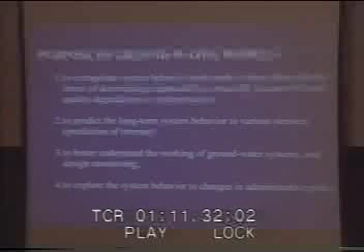Now, what did we start out to use the models for? I can't see that slide very well, I apologize. But the first thing is that we're using the models in a way to determine who's responsible for certain actions, particularly what PRP contaminated a certain aquifer. Where did the contamination come from? Who was the PRP? So that's one of the issues that the models are being used for. So in this sense, we're trying to backcast with the models, go backward in time, to try to see who was responsible.

Okay, the next thing is we've also tried to predict into the future what happens if a certain stress is put on the system, and a lot of the models do that sort of predicting into the future. When we've gone back to look at how well we do with those predictions, it turns out they're not very good. The post-audits we've done suggest that the predictions were not very valid, for good reasons, I think.

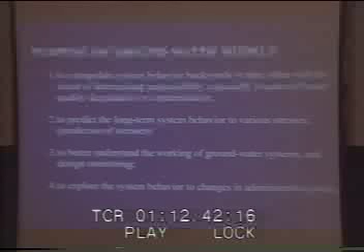Now, some of the things that the models could be used for is to gain a better understanding of the system. And that doesn't take a terribly sophisticated model in most cases. In most cases, we could do that with a relatively small model, fairly unsophisticated, and we could ask simple questions of how does the system behave. I don't see very much of that going on. We could also use the model to try to design where are the appropriate places to sample the system. Where should we be looking for data in the system? That isn't going on very much, in my opinion, either.

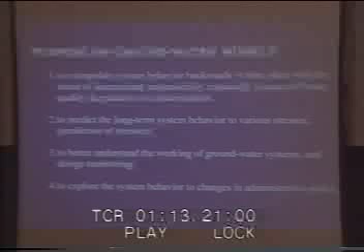And the final thing is the models can be used, I think, in a policy analysis to try to say, in a particular case, what is the best way to manage this aquifer? Are there better ways to manage the aquifer? And what drives the aquifer? What are the critical issues as far as the aquifer is concerned in terms of its management policies? All right. So those are my categories of what I think the models are being used for, and I think we're seeing that much of the effort lies up here, particularly at the present time, at least what I see in my consulting practice. And these are the models that I think are getting very complicated.

All right. Now, one of the other things that you say to yourself, okay, we're going to go to court with these models. What are the things that we need in the modeling effort? And we all know what those are. We need some estimate of the transmissivity. We need some estimate of the storage coefficient. We need the boundary conditions. We need what the stresses are in the system.

Now, the question is, how many of those things do we measure independently? Well, in the case of the pumping tests, we certainly have procedures where we can measure transmissivity by pumping tests and various kinds of pumping tests.

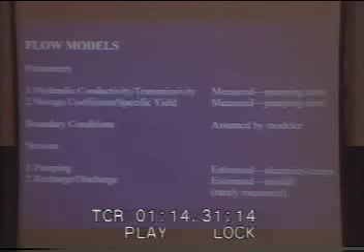All right. Those pumping tests also yield some estimate of the storage coefficient, but usually what you find is that when you extend the model into the future or you try to make some long-term assessment of what the storage coefficient is, what you get from the pumping test analysis is generally on the low side. So we don't know from the pumping test the storage coefficients very well. And we get a better measure of that from the long-term analysis as a system, usually done with the model.

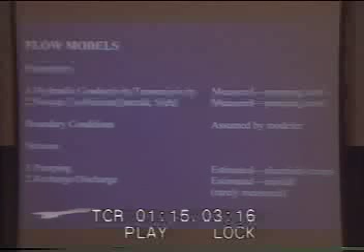The boundary conditions are assumed by the modeler. Sometimes we have pretty good ideas on where the extent of the aquifer goes. And then the models are very sensitive to what the stresses are. The stresses are known not all that well.

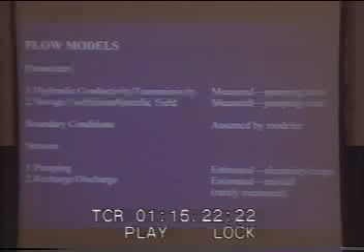We estimate stresses in many cases from metered electricity. Of course, the pumping depends on how efficient the well is, and often we don't know how efficient the well is, so we estimate the pumping based on the electricity, or we estimate the pumping based on, in agricultural situations, what the crop requirements are.

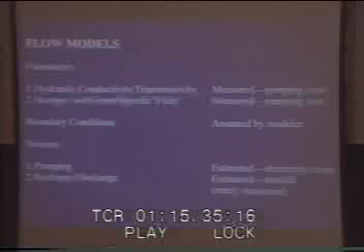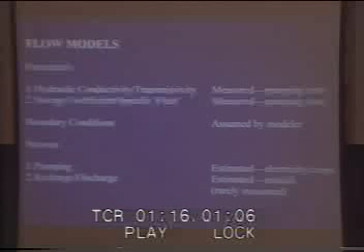So again, we see that the stresses, which are critical to the modeling, are not known all that well. In fact, in some cases, I don't think they're known very well at all. All right, so that's the flow models. So we may be able to measure the transmissivity reasonably well independently of the model, and we may have some reasonable estimate of what the stresses are.

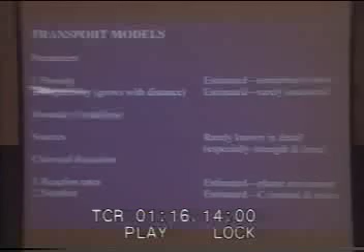When we look at the transport models, we see something a bit different. What we find is, first of all, the estimates of porosity are not very good. There aren't very good ways to measure porosity. Sure, you can measure cores in the laboratories. Cores have the same problems as measuring permeability in the laboratory.

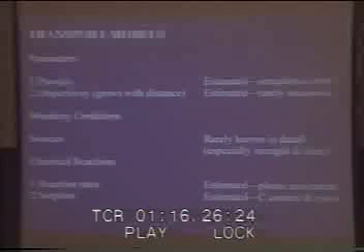So we make an estimate of porosity based on what the aquifer material is. Rarely do we go in the field and try to measure the porosity with some kind of neutron probe. It's done, but rarely. Okay. We find from the dispersivity that we don't know what the dispersivity is. We know it grows, usually with the distance that the contaminant is moved, and it is very rarely measured independently.

And we go on: the sources particularly are rarely known in time, particularly when you say to yourself, well, when did that contaminant come into the system? We don't know. We know the plant was built in 1962. We have some idea of what the contamination looks like at the moment. We don't know what that source term looked like. And the same is true of the chemical reactions. How do we get the chemical reactions?

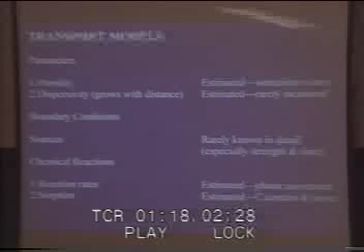Well, we get the sorption from, in fact, we get most of these parameters from the model fit. So these things are not measured independently. We're getting them from the models. And then you say, well, how good are they? I think it comes back to how you feel about the inverse problem, and how good is your optimization on what the parameter set should be. But again, you're backing almost this entire parameter set out of the transport models. They're not measured.

So for that reason, you can come back in a courtroom and challenge most of these things. You can say, well, did you measure that independently? No, we got that out of the model, which may or may not be adequate.

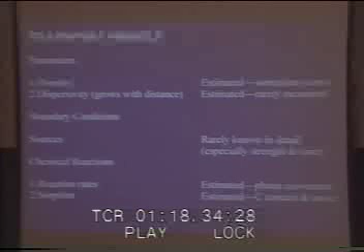All right. Now, what I'd like to do is show you a model analysis that we did recently for Mexico. I'm working for the World Bank in Mexico, and this Hermosillo aquifer that I'm going to show you in a minute is kind of a case study of aquifer problems in parts of Mexico. And I'd like to use it to illustrate how I think the models can be used in an efficient way.

All right. Now, as I said, I'm working for the World Bank. We're looking at groundwater all over Mexico, but we're focused in on Hermosillo as one of 5 aquifers that we're going to use as case studies. I'm working with an economist, an old-time friend, Bob Young, retired from CSU. Bob and I worked at Resources for the Future in the early 1970s on similar problems.

And this aquifer is rather interesting. Pat Domenico did a model of this some 25 years ago, so Marty Mifflin tells me, as part of a water plan for Mexico. So it's an aquifer that's well known. It's an area of groundwater development in Mexico that's well known. It's near Hermosillo in the state of Sonora.

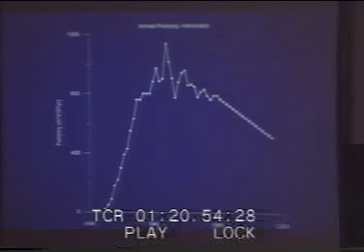But what I expected was that near the coastline there would be the sort of thing that you see with seawater intrusion, everything would have gone out of production. What we saw was that it had gone out of production along the coastline, but it was out of production everywhere. There was a lot of this irrigated area that had been let go fallow. So it was clear that not the only problem was seawater intrusion, something else was going on as well.

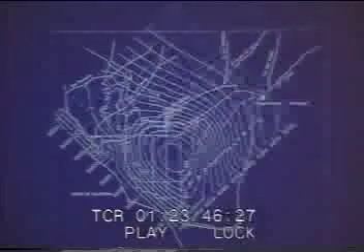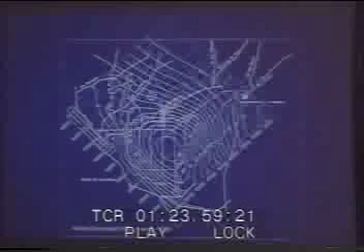All right. So we modeled it, first of all, to get some kind of 1996 drawdown. And this is the model here showing we get about 55 meters of drawdown. It doesn't have all the features of the observed drawdown, but it isn't too bad in terms of fitting the cone of depression over the entire area. So that's the 1996 water level projected by the model.

This is the seawater intrusion projected by the model, and you see that there's a zone here, this goes from zero. It shouldn't be zero. It's about 300 parts per million background. But anyway, this is the buildup from seawater coming in, and we go from something like 500 here to around 5,000 in this area. And you can see the bay here, this Kino Bay, has some big effect on it. At the moment, 1990s, present time, we've lost about 12 to 13% of the irrigated area.

So you can see this was the original irrigated area right in here, and something like 12% of it has been lost to seawater. All right.

Now, one of the things we tried to do in this case was to link a simple economic model to the groundwater model. So we calculated what the water pumping would cost in terms of the lift costs. We calculated both the fixed costs in terms of the investment costs and the pumping costs associated with water development. And then we looked at this set of crops, which was determined by the Mexicans here. You can see I think there are 17 or 18 crops here.

Some of them are field crops, and some are fruits, grapes in particular, things that are higher value crops and require more care in terms of the irrigation and also some investment in developing the crops themselves. Particularly things like grapes, you've got 3 years or so before you begin to get any yield. There are pecan trees in here which take a longer period of time to get some yield. So this was developed by the Mexicans. Things here are in hectares, and I don't know if we got prices here in terms of pesos.

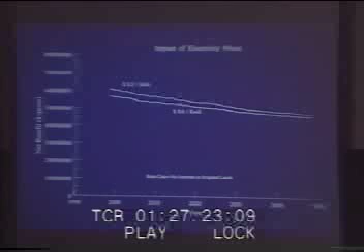All right, so this is one of our first simulations, and what we got here is an income stream, I think. I can't read that over there, but I think this is the income, net income? Net benefit, right. Income, net benefit. And you can see we start out here somewhere around, as I recall, 600 million pesos, and the thing declines over time. There's some difference in the energy costs.

The energy costs at the present time are about 0.2 of a peso per kilowatt hour. That's a subsidized cost. The Mexican government is subsidizing energy for agriculture. The real cost is something like 0.6 of a peso per kilowatt. Excuse me? Pesos. They use the dollar sign, but it's pesos. And you can see this is a projected income stream out to something like the middle of the next century.

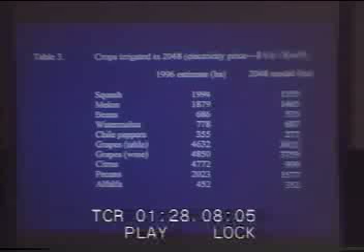All right. And what happened in this case is that of those 17 crops we started out with, this is what we were left with. So even in the first year, we eliminated most of the field crops. Most of the field crops are no longer profitable. And that's what we saw in the field. When you went down there and looked, you saw that a lot of the field crops have been dropped out. And what you were left with were basically high-value crops: citrus, pecans, grapes, particularly table grapes. Table grapes turns out to be the crop of most value.

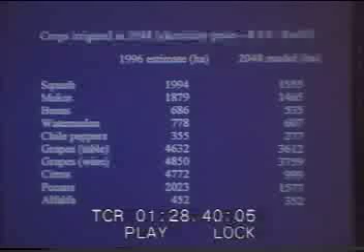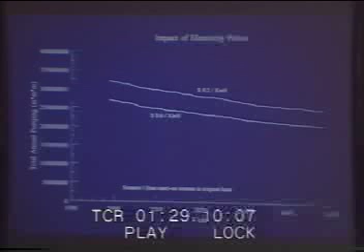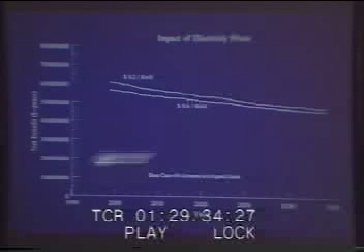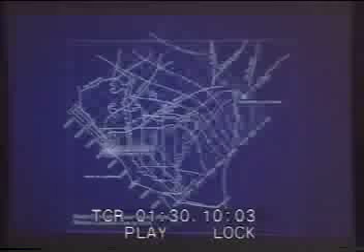Okay, so then we cut it back by 50%. And I can't read, that's the pumping? Oh, okay. I mean, it's rather simple. All right, and then what you see is the water level comes up quite a bit. So we've had some benefit in terms of the cone of depression.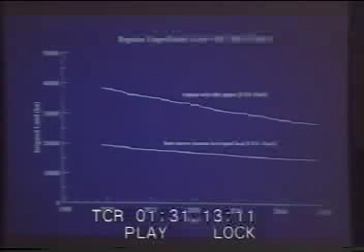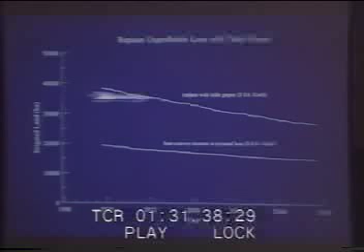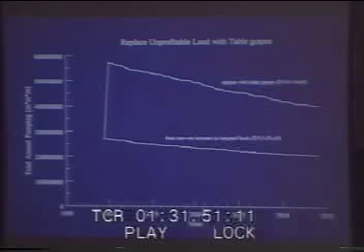So the next thing we did was to say to ourselves, all right, suppose we take the highest value crop now, and as we eliminate certain crops, let's take that acreage and put it into the highest value crop. The highest value crop turns out to be table grapes. Okay, so that's what we've done in this case, and you can see, I think that's pumpage. I can't read it from here, I'm sorry. Anyway, the irrigated land. So it jumps it back up again, and you can see that we irrigate quite a bit more of the area. All right. Now, that's the pumping, and you can see the pumping jumps up as well because we're irrigating much more land as we replace it with table grapes.

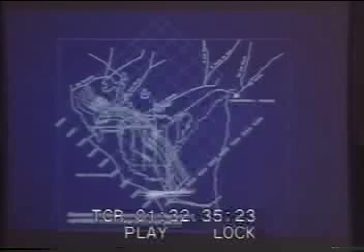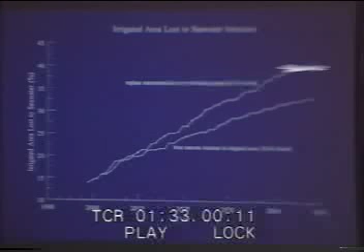All right, but here's the seawater interface after 50 years, and you can see we really cut into the irrigated area now. So we've got, in fact, the seawater way in, and we've eliminated the bulk of this larger irrigated area. And that shows up here in terms of the percentage of the irrigated area. This is the base case, and now we're up to somewhere around 40% of the entire area has gone to seawater. So we've got a very big problem in terms of seawater intrusion, although the income stream doesn't look so bad. You can say to yourself, okay, that income stream for the next 50 years really doesn't look bad.

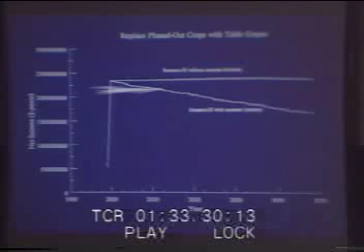All right, now this is the income stream from this particular scenario where we replaced everything with table grapes. This is the income stream without the seawater intrusion, and this is what happens when we put the seawater intrusion on here. So you can see that this decline in the income stream is a result of the seawater intrusion.

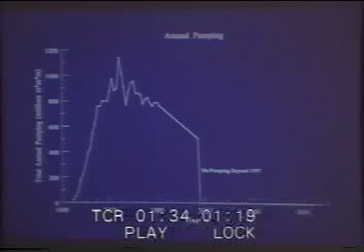All right. Now, then we did one more scenario, which I thought was maybe the most interesting thing we did. We said, okay, here we sit at 1996, this was the last time we had data. Suppose we just cut the pumping off, stop pumping. What happens to the seawater interface? And what you see is, here we are right here, and we stop the pumping, and here's the seawater interface. And we all know that's going to happen. We got a disturbance that's about 50 years old. It takes about 50 years for that disturbance to die out of the system.

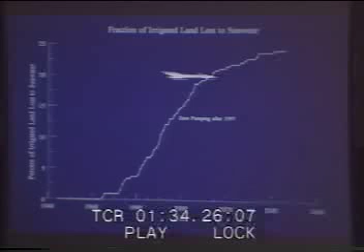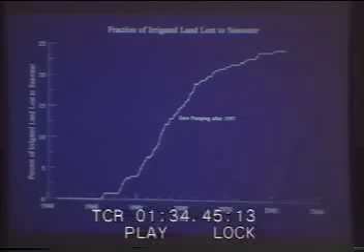But what that means in this case is we're going to continue to have seawater intrusion in this system no matter what we do. And it'll about double. We've got it here at 12 to 13%, and it goes to about 25% in the next 50 years. So that's what you'd expect intuitively, but I think it's interesting to do that with a model and say, okay, what really happens? And then a little bit more of the story. All right.

Now, so there's some policy relevant decisions to be made here. First of all, you can see that we could run this system for 50 years, get quite a lot of income out of it. And if you said, well, let's discount that back to present net worth, you know that with any kind of a positive discount rate, you will not see much benefit beyond 50 years. In other words, you're weighing everything to the present, and of course that's a substantial income stream, and you say, well, those farmers can make a lot of money down there if we just continue the system.

On the other hand, if you want to continue this system sort of indefinitely, so you say we want some kind of sustainable system here, you can see that you're going to have to do something with the saltwater interface. The saltwater interface is really a problem, a long-term problem for the development of this aquifer. And unless you stop that saltwater interface, you're ultimately going to lose the entire development. So it seems to me there are real policy decisions to be made here.

The question is, do we do as we've done in this country, or we say to ourselves, well, let's go ahead with the development. We'll worry about the future after this development is over. And we certainly did this in the arid parts of the United States at least. All right.

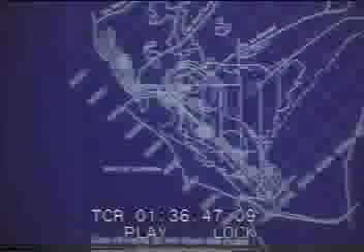So then you say to yourself, okay, the World Bank said to me, what could we do to stop this? Well, the traditional thing to do, of course, is to come in here along the coast and put in a line of barrier wells, inject in a barrier, and stop the seawater intrusion. And here we are with a barrier that's about 25 to 30% of the total pumping. We're pumping in at 200 million cubic meters a year here, which is about a third of the total withdrawal. And a barrier line right in here, okay?

And that's kind of interesting because we didn't get it quite far enough in, and there's a lobe of seawater here that's beyond the barrier, and it shows up kind of in here too, but it shows up best here. So the barrier in this particular case is not in a very good position. If you move that barrier in a little further, of course you can control that seawater interface, and you can hold it. And 200 million cubic meters a year looks like it wouldn't stop it, but it would certainly slow it down one heck of a lot.

All right, so then you say to yourself, where are you going to get 200 million cubic meters a year? Well, it's not so easy to get unless you come up here somewhere and pump it out of the aquifer and then pipe it down to the coast. It seemed to me that the other possibility was to put in a line of wells along here and pump out, much as we do with pump and treat systems, to try to capture that seawater as it's coming toward you.

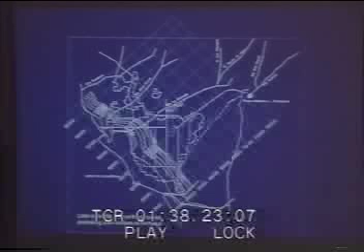And this is a simulation of that system where we put a line of wells along here and pumped out at 200 million cubic meters a year again. And you can see again that you can control the interface. It doesn't totally stop it. The pumping would have to be larger to control the interface, but it certainly slows it down. I didn't look to see how big it would have to be to stop it entirely.

All right. Now, this is the kind of model where it seems to me you gain a lot of insight into the system behavior. And the model itself was relatively simple, and as I said, I think it provided us with a lot of insight as to what the policy issues were with respect to this Hermosillo aquifer. And this is the kind of thing that models are ideally suited to do.

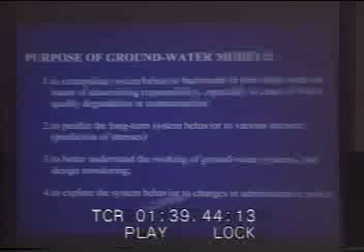All right. Now, I just want to come back and again make my point. My point is that I think what we're doing is hurting us in that we've made these models so complex, so big, and so costly that the clients are reluctant to allow us to do the modeling. And for that reason, we don't get to these simple kinds of models which give us some understanding of how the system behaves. And I don't see very many instances where we're trying to use the models in some kind of policy framework.

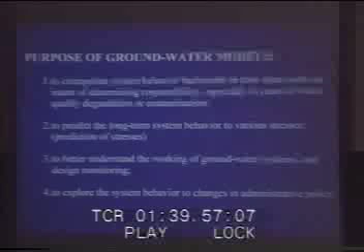So my conclusion I would suggest to you is that we're hurting ourselves in the way we are using the models at the present time. And with that, I'll stop. Thank you.

It would certainly help me. I can't see the audience. Thank you. Questions?

John? Semantic question. You use the word complex. Later on, you use the word sophisticated. Do you distinguish between sophisticated models and complex models? No, I don't want to make some kind of judgment, John, about what the difference is. I have a value judgment in that there are situations in which sophistication is warranted, but I see the word complex in a negative way, so it's sort of the same thing.

You can have an overly complex model that doesn't necessarily represent reality. In fact, it's gone along some curve of complexity to the point at which it has no resemblance to reality at all. But something sophisticated can be based on fact and can represent that reality quite well. The issue here is uncertainty. The complex models replace what you don't know about the system with complexity. I think that's true.